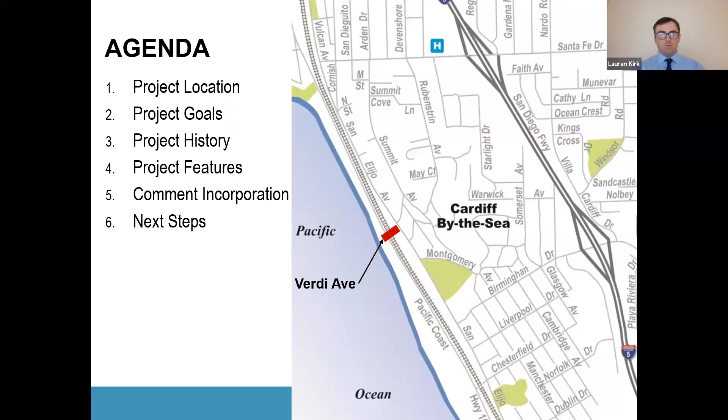So as you can see here to the right of the slide, we have where we'll be crossing the railroad. It's between Liszt and Verdi on San Elijo. It's the red rectangle that you see right there. Next slide, please.

I believe Aaron. So yeah, this is just a more detailed zoom in of the project location. You can see our major constraints are San Elijo Avenue to the east. We have the railroad going through the middle of the project and Coast Highway to the west.

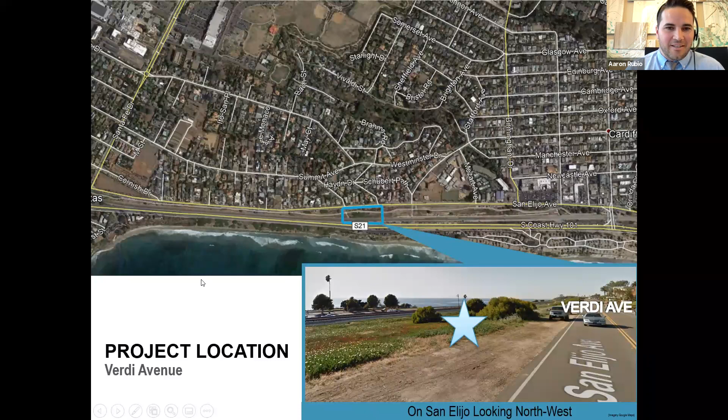So now I will kick it to Gheorghe to go over our project goals and our project history. So the project is trying to achieve the following three goals.

Number one, it's safety and providing a safe, protected path across the railroad. Everyone, all the residents here know how active the trains are here through this area, but also the residents as they've been utilizing the resource along the right-of-way there.

Also to provide access. This is definitely a kind of trying to get pedestrians access from the east side of the railroad right-of-way to the coastal side, which is an important public resource. And so providing that access to pedestrians and bicyclists alike is critical.

And you'll see later on all of the coordination that has gone into this project with other projects that have taken place already here in the area. And then lastly, the ease of use, providing something that is convenient, that can be easily navigated by pedestrians.

Everything from moms with their strollers taking their young children across, to bicyclists who want something wide enough to get through and pass each other. So mobility was one of the key goals we wanted to accomplish with this project. As we dive into the project history and features, you'll see the lengths this project team has gone through to achieve all three of these goals.

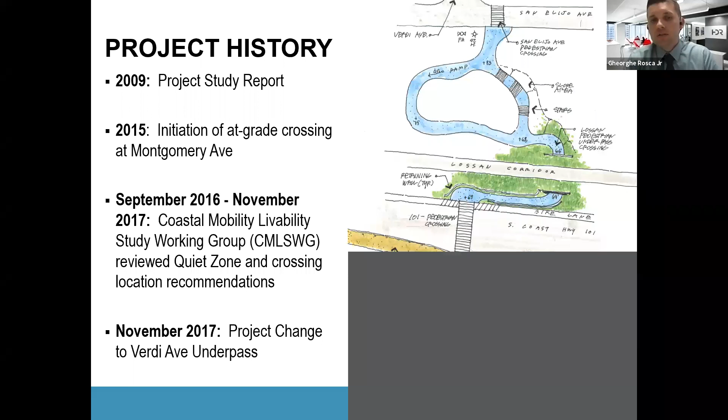We continued with preliminary design in 2017 and early 2018. Just over 3 years ago we held our first open house meeting at Cardiff Elementary, where project features were presented in more detail. There was a lot of input provided, which we used to advance towards a 90% design from September through July of last year. Today we're here for a second open house to give a status update on all those project features.

This project was coordinated with a plethora of other projects, including the Coastal Rail Trail, shown here looking north on Chesterfield Drive. This entire area has seen significant improvements at Chesterfield Drive, continuing with the double track to the north, future potential Cardiff trenching - we wanted to make sure we're not precluding that from happening - the Birmingham Streetscape project, the Chesterfield Quiet Zone already in place, and the rail corridor vision study together with the active transportation plan. We've taken efforts to coordinate with all of these projects.

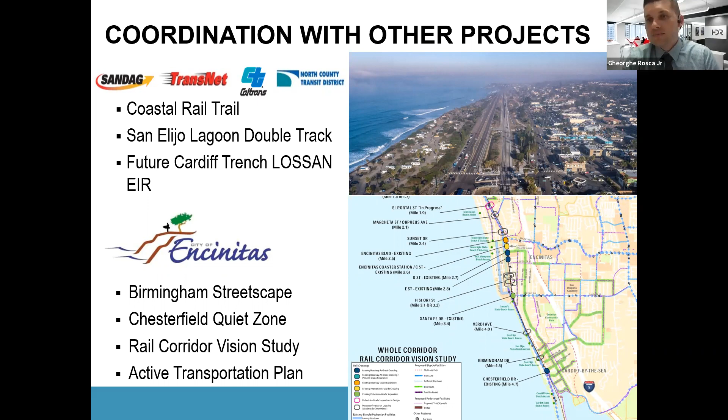And I'll transfer it to Aaron here to speak specifically on the project features as they are today in the design.

Bear with me with this engineering style drawing - our main constraints are connecting San Elijo on the east, getting pedestrians to cross at grade over the existing Encinitas Coastal Rail Trail, sloping down to cross under the railroad tracks, and back up to cross at grade at Highway 101. We have landings at both the Verdi and Liszt Avenue intersections at San Elijo, providing both a direct access path with stairs and an ADA path from Verdi, which uses the Coastal Rail Trail and then the longer ramp down.

Same thing with Liszt - we have both the ADA longer ramp and a more direct route for access. We're tying into the existing Coastal Rail Trail at its current elevation, so there's minimal change or modification to the rail trail. Once we cross over the rail trail is when we start the excavation and sloping down to get under the railroad. The crossing, a 3-span bridge, will be very similar in all aspects to the Santa Fe crossing a few miles north of this location.

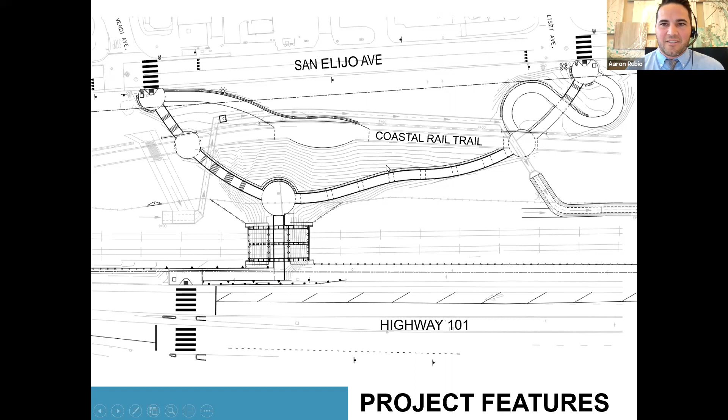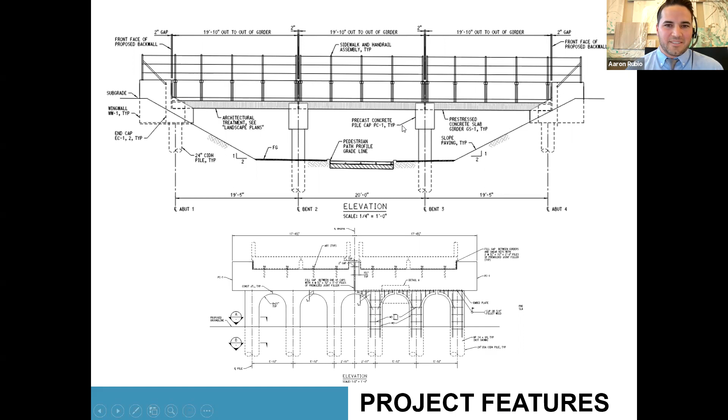So we do have the crossings at San Elijo Avenue. There'll be these flashing beacons, pedestrian activated flashing beacons. And then across Highway 101, we'll have a signal, a regular pedestrian activated traffic signal. There'll be no turning allowed, just straight through movements for traffic, but we will have signals there similar to Santa Fe.

So now I'm going to kick it over to Mike Peltz to talk about our previous concepts that we brought to the original open house in 2018 and how we've addressed some of those comments in our design.

Well, good evening, everyone. Thanks for tuning into this. We appreciate your participation. What you see on the screen right now is the plan that we showed in 2018 at the first workshop. We were challenged, as George had mentioned early on in the presentation, to

kind of elaborate on a land theme. We had several ideas and we kind of threw them at you, and you responded well, and we appreciate all the comments we got during the workshop and also the written comments that came afterwards. We listened, and so what we've done is simplified this design and all the patterns.

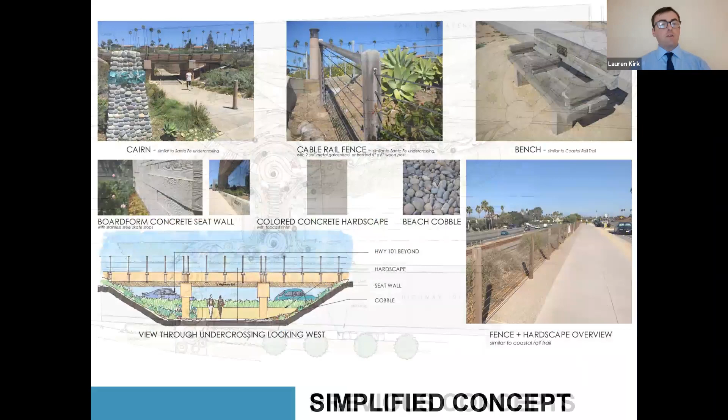So the first one is from Mr. David Solomon. What are the dots on San Elijo by the crosswalks? I think he's referring to the construction notes. If you're referring to... I don't think it's on the plans he's referring to. I think he's referring to the rendering, the watercolor.

Chugging along. There we go. I believe he means these black dots. Originally, over here to the right, there was a series of notes, each one labeled 1, 2, 3, 4, and it just points out what each one is that the black dot is touching.

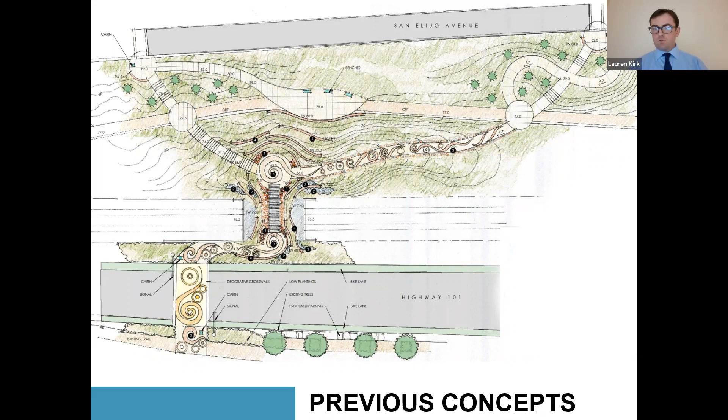Next one is from Diana Nunez. So the project cost we're estimating to be around $9 million.

So the next question is from Julie Thunder: Can you explain the funding deficit? Jill, can you take this one?

Sure. So we have a wide variety of project needs throughout the city. As we're developing our budget and getting through COVID, we've seen our revenues decline a little bit over the past year, and we're expecting them to be flat. So we have a lot of important projects for the community, but for this one we'll be seeking grant funding and looking for other opportunities to fund it in the near term while we wait for funding to come along to get to the construction phase.

The next one comes from David Solomon: Fantastic job on the plant palette. Thank you very much for the comment.

I'll move on. Next one is also from David Solomon: When do you think you will start and end construction? Again, with construction, we're hoping to start in summer 2021. Aaron, do you have an estimated duration you think it would take?

All right, next one comes from David Solomon again, referring to the slide with the crosswalk. Aaron, you want to jump us back there? He was asking if there are any blinking lights to help us cross San Elijo.

It might be the shark teeth he's referring to. Those shark teeth are to let you know you're coming up to this crosswalk. There'll be flashers on either side of the street, but no flashers within the street itself.

All right. If there's any more questions, we'll all be on here for a bit longer. Okay, one from CM Lindes.

I'll read this one out - I don't know if everyone can see what's being typed. Please feel free to send your support for the funding of this project to me, Councilmember Joy Lindes - I apologize if I butchered your last name there - at jlyndes@encinitasca.gov. That's jlyndes@encinitasca.gov. We're all working together to find funding for this project, and your comments and support are always valuable. Thank you very much, Councilmember.